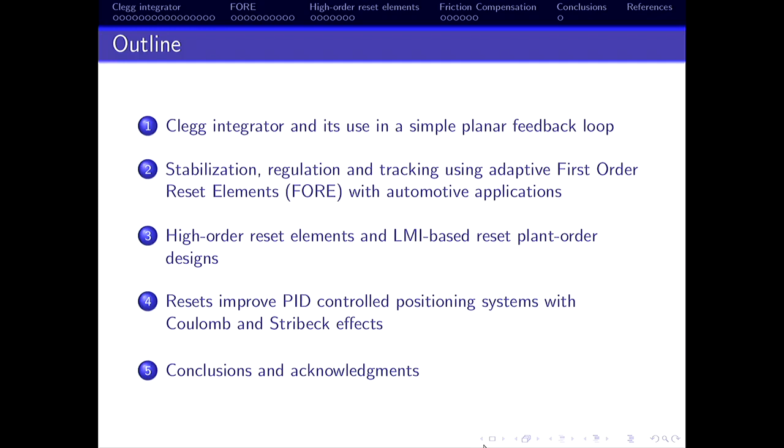Okay, so let's start with Clegg integrators, and in particular, what we're going to look at is very, very simple feedback loops with just a first-order system. So a lot of what we're talking about here is simple. Let's try to make it intuitive. And let's go back to 1958, when analog controllers were around. And so Clegg in 58 said, okay, if we have a PI controller, which involves an integrator, let's try to add a nonlinear nature to it to perhaps improve convergence, performance, phase lag, or something that was measured back then in terms of the linear tools that were available.

In particular, the analog version of an integrator with an op-amp is exactly this. So the differential equation is this one, and if this is minus xc and it's the voltage across the capacitor, that's the integral of the input E. And we're looking at an error feedback interconnection, so to speak. So let's consider the input of this guy being E, as in the tracking error or something. So what Clegg did, he said, let's split this in two parts, an upper and a lower part, and the novelty is these diodes.

So if you look at the upper part, the voltage here, whenever it's higher than the input voltage, will cause conduction in the diodes. So the voltage across this capacitor will discharge. That's a reset to 0. And the same will happen here if this voltage is very low. As a consequence, all and only the positive part of the output is stored up here, and all and only the negative one is stored down here. In particular, it's impossible for this circuit to have opposite signs at the input and the output. So the resets enforce this very peculiar property of ensuring that input and state, or input and output, have exactly the same sign.

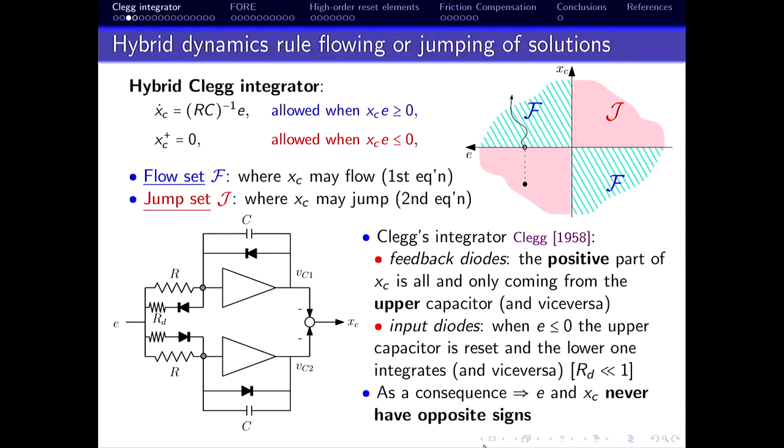Now, this is a hybrid system, and in particular, we call this F the flow set, and the J, where jumps occur, is the jump set. So if you think about evolution of solutions following the great work carried out by Teel and co-authors in the past, say, 15 years, you could put a timer in the solution that is continuous time, which will increase as solutions follow the differential equation, whereas there's a counter counting the jumps that will only increase as solutions follow the difference part. So if we rewrite this in that context, essentially we will look at solutions as having a domain which is a cross product between continuous evolution T and discrete evolution J.

And in particular, the differential equation only relates to T, of course, whereas the difference equation will experience an increase of J, which is, of course, discrete, right? Because that's a discrete time part of the dynamics. Now, if you think about this type of representation, everything becomes pretty much clear about what's going on. The solution either flows and then T grows and J stays constant, or it jumps and then T is frozen and J counts the jump and it grows.

And in particular, if these two sets, F and J, are closed, because of the regularity of this data, if you establish stability of some interconnection of this guy to some, say, linear plant, that stability that you establish is robust, okay? So that's a nice result that all the group has been working on and is well summarized in their 2012 book.

Now, I would like to emphasize what's the advantage of this. And we've been talking about this with Andy Teel and Dragan Nesic during this trip to Australia back in 2004 during the Asian Control Conference, where a lot of these preliminary ideas came up, and much of this talk talks about that stuff.

What is interesting is that back in '58, Clegg was saying in his paper, my circuit resets when E is equal to 0. And this was somehow carried over in later years by Horowitz in the 70s and so on. And people have always been thinking about the resets as being this thin line. Now, the problem with that, especially when you're looking for Lyapunov certificates, is that solutions from here for this model will have to flow. And so if you impose a flow condition on the Lyapunov function, that's overkill, actually. You can see that you will have to impose it everywhere by continuity.

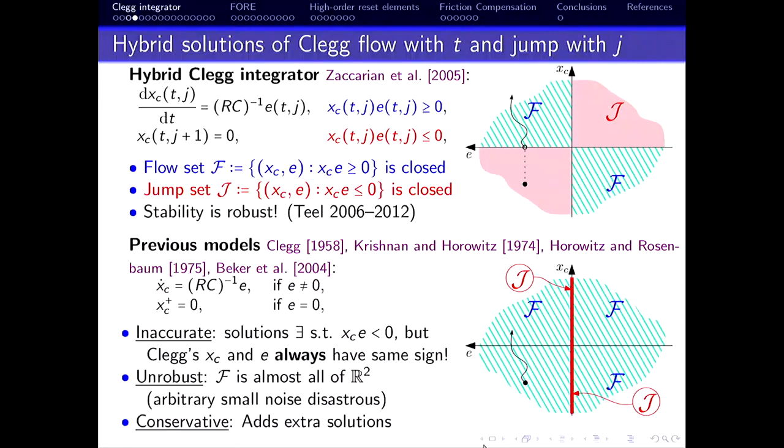Okay, so what can we do with this? We can apply a lot of very useful Lyapunov theory, but perhaps the simplest thing I can tell you is, let's say you have this system, and perhaps there's already an interconnection of the Clegg integrator with a plant. If you want to establish stability of the origin, you could search for, say, a differentiable function V, or a Lipschitz one, which satisfies what we call the sandwich inequality. So you sandwich V within quadratic bounds, so that's positive definiteness and radial unboundedness.

And also, you have a flow condition of the typical continuous time type. So V dot has a negative quadratic upper bound, but you only need to enforce that in F. So that's an important message. F is now half of the state space. And then you also need to enforce a jump condition. That is, when the solutions jump, they should lead to a decrease of V, as in this negative upper bound again, but only in J. Okay? So we call this the flow condition and the jump condition.

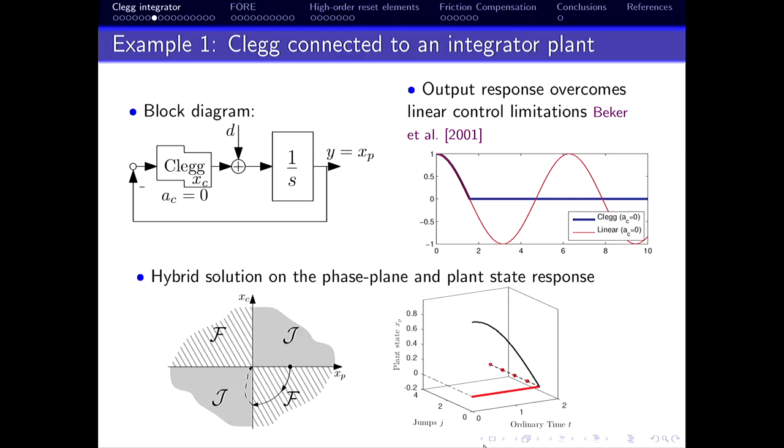It's not really true because there's another bad solution. If we start here, we're at the boundary of J, and there's another solution which can jump, and it jumps forever right here, and it gets stuck exactly at the boundary. So if you're looking for a Lyapunov function certifying stability of the origin for this system, there's no way you can get it, because the origin, at least for the simplified model that we built, is not globally attractive.

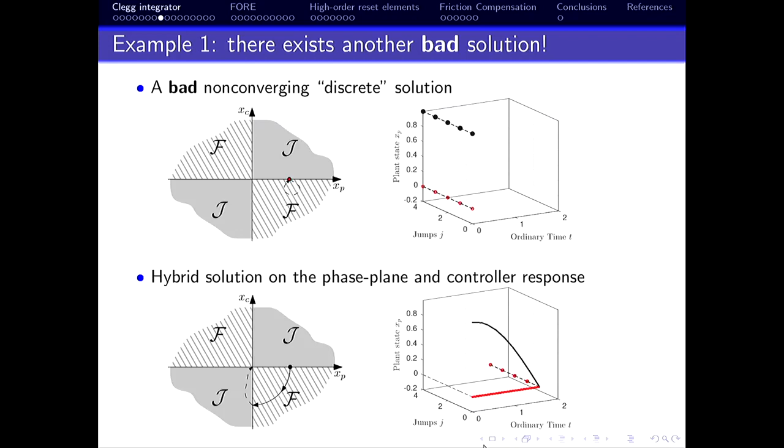So how can we do that? And that's what we've been thinking, like how can we rule out this bad solution? There's two ways, okay? So one is called time regularization. And it essentially comprises starting a timer and inhibiting resets after each reset for some continuous time rho. So you wait rho, and the solution will flow and get away from J so that it can continue as I showed you before. And that works.

The other one is space regularization. That means we can twist the sets in such a way that the jumps will map to the interior of F, so away from J, and a second jump will not be possible. What does that mean from the Lyapunov viewpoint? Well, for time regularization, you have to accept that because of this timer, solutions may flow outside of F. Okay, and we'll get back to that in a sec.

And then in the other case, the problem is more subtle. So you could get space regularization by twisting, you know, the sets in this nice homogeneous way. But the problem is that to make sure that you jump to the interior of F, you really have to be careful about the additional directions. So we're looking at the plane here, but let's already think about what to do with higher order plants, right? So this axis is a lot of directions. And for sure, you will need information about the whole state to comply with this type of requirement, which is kind of an overkill, okay?

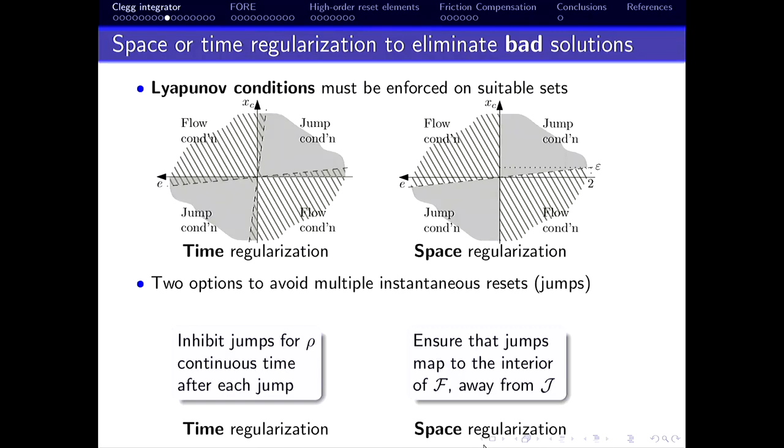Anyway, so most of this talk we will be talking about time regularization, and I would like to introduce a family of systems that is described by this type of logic and that generalizes the Clegg that I showed you so far. So essentially, we're looking at sets F and J, but the sets where the solution is allowed to flow or jump is a bit more sophisticated and depends on the timer. So we introduce the timer tau, which is reset to 0 after each jump, and we are essentially not allowing jumps by definition of D whenever the timer is too small. So the timer has to be larger than or equal to rho.

The nice feature about this is that after each jump, there will be rho flowing time. So we will have what we call persistent flowing, right? The bad side, though, is that because we are, you know, inhibiting jumps, we must allow for flows even though X is not in F, which is what you're seeing here, right? So essentially, we're allowing flow when tau is too small in places that we cannot predict. And that's kind of a problem. So we might have this overflow.

Well, the good news, though, is that at least for these systems, we can prove things that are similar to, you know, linear systems, like equivalence between local asymptotic stability of the origin in the X direction, global exponential stability, LP stability from D, so D is a disturbance, ISS. Okay, so we can use those results. And let's see, if we go back, oh, actually, there's another thing I wanted to tell you.

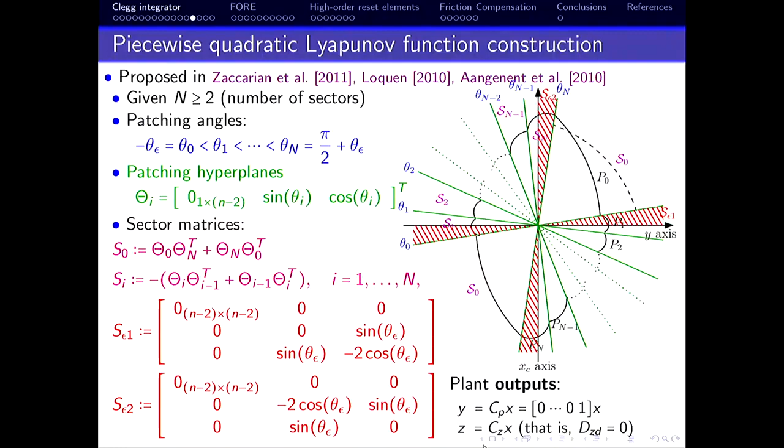And then you have a generalization of the previous theorem. Let's say you have a flow condition, you have a jump condition, and then you have some continuity conditions and some overlap conditions related to the overlapping conditions that I mentioned when I introduced time regularizations. I told you need to ensure that you do well when solutions overflow. So let's go back to the Clegg integrator. We're comfortable with these things. Here are the solutions. They revolve, they reset, they revolve, they reset.

So first of all, there's no quadratic Lyapunov function. You can actually prove that. So you cannot find a quadratic Lyapunov function that certifies global asymptotic stability of the origin, which is exponential because of the other theorem, by the way. Anyway, so we can build a piecewise quadratic. You see how it comes out? This is the level set. It's kind of interesting that there's a lot going on in the flow set, second and fourth quadrant. This is a really simple function on the J.

And again, I'm going to go back to the original thing I told you. Recognizing that the Clegg integrator resets only in half of the state space is fundamental to start talking about Lyapunov functions. And you see that here. So this part is easy. And it's easy because we recognize that the circuit resets over there, okay? And also, you can estimate the L2 gain. And as you increase the number of functions, you get better and better.

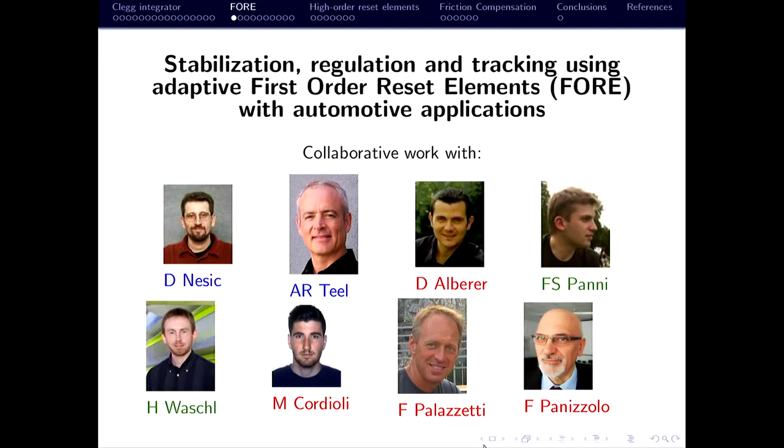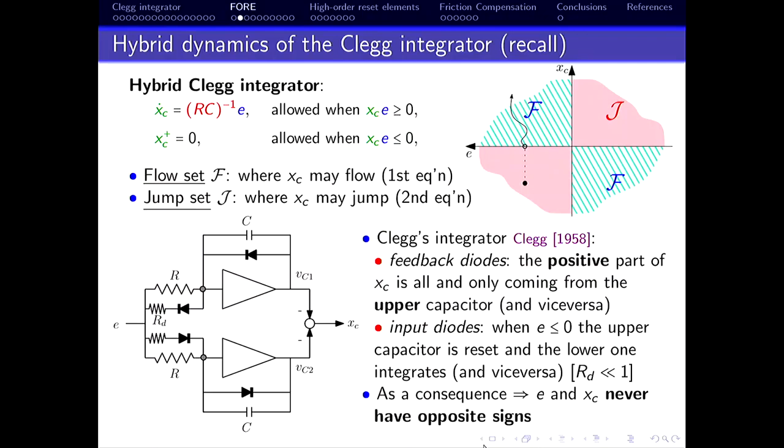Anyway, so let's move on to the second part of the talk. And let's see how we can use now these reset controllers in some more practical things. And in particular, let's extend the ideas of Clegg to something more sophisticated. So I'm back to the previous slide. You've seen this already. And let me think about this as some linear filter with an eigenvalue at 0. So we can add this eigenvalue, and the dynamics will become like this, right? And that's what Horowitz proposed in the 70s.

Except Horowitz insisted on this AC being negative, being not positive. For the Clegg, it's 0. But he insisted on stable first-order reset elements. Now, what we did by looking at these interconnections was to say, oh, no, but let's go beyond that. And indeed, you can prove that if the plant is minimum phase relative degree 1, so let's say a simple plant, but still higher order, then you can crank up the pole. That means making this guy arbitrarily exponentially unstable, and so also the closed loop, or crank up the loop gain, or both of them, and you obtain eventually global exponential stability of the reset feedback.

So let's look at the trajectories. Let's stick an integrator here once again, just for simplicity. And then let's pick the loop gain equal to 1 and increase AC. So for a very negative AC, you don't even reset, okay? Now, for AC equal -1, the linear response would be the black. The blue is the reset. Deadbeat, again, you've seen this on the Clegg integrator. It's the same old story, right?

And in particular, now if we increase this guy, we start seeing exponentially diverging branches which are reset in a deadbeat way. So that's beautiful. That's the main message I want to deliver today. We can introduce exponentially diverging transients on stabilizing controllers. It's really cool. I don't know how useful that is, but maybe it is a bit. So let's look at an application. Oh, no, but first let me actually show you what you get.

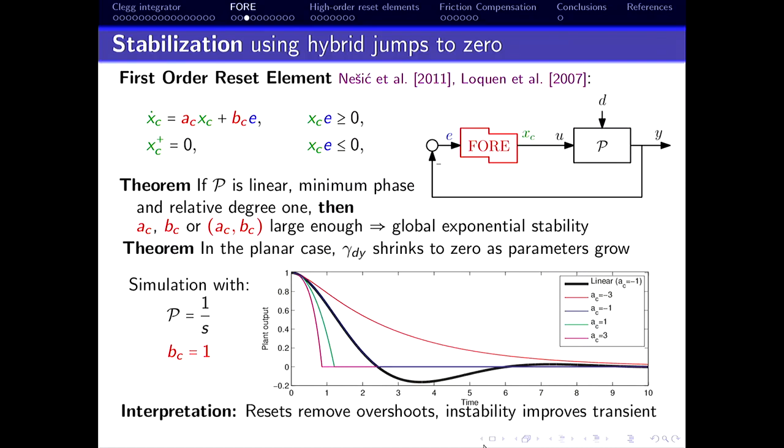So let's apply this thing, and in particular, let's apply again the piecewise quadratic construction to a second-order plant. It comes from the literature of resets, work done by Hollot in the late 90s and early 2000s. So with this one, this is the type of Lyapunov function that you get when you project on the input-output space of the Clegg. Remember here, the state space is three-dimensional. And the gain actually goes to infinity if you only look at the linear without resets, and then goes to 0 asymptotically as AC grows. Of course, we don't have a proof of that, okay? We only proved it for scalar plants.

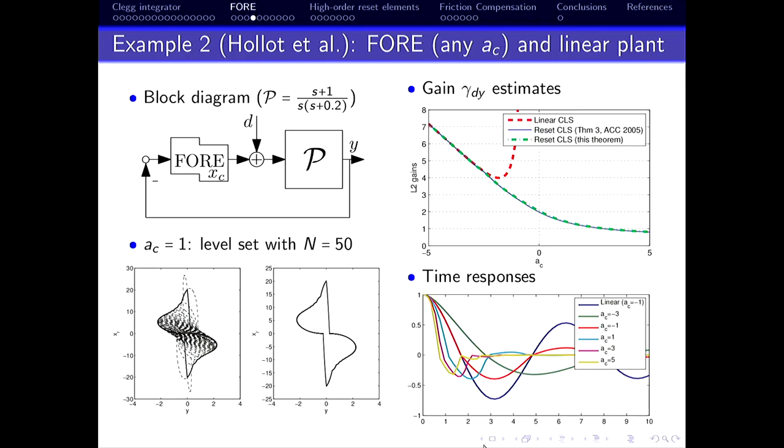But still, looks interesting. Now, if we want to apply this experimentally, the first problem we encounter, and that's another message for today, is that by introducing resets and resetting this guy to 0, the U will go to 0 every time, and that is, in a sense, if we had an integrator, we will lose the internal model properties of the original linear feedback with constant references. And that's actually overkill. So you will start seeing solutions that keep oscillating. So one way to reintroduce the internal model in a clever way would be to introduce an adaptive feed-forward.

Okay, so the feed-forward here is some function that may also include some nonlinearities that we know will happen at the steady state, times some parameters alpha, which are not adapted during flow. They are kept constant during flow, and they are adapted at jumps based on the value of the feedback state. So the feedback state, in a sense, captures the information about the previous errors that we made.

And it turns out with a scalar plant, you can tune the gain lambda of this adaptation following some kind of Ziegler-Nichols type of approach. So you take the system into oscillation for a large enough lambda, and you get something similar to the green curve here, a bit larger. You divide it by 2, and you get some sort of deadbeat convergence of these parameters. Now, if you go too slow with a very small lambda, this convergence will be a lot slower, okay?

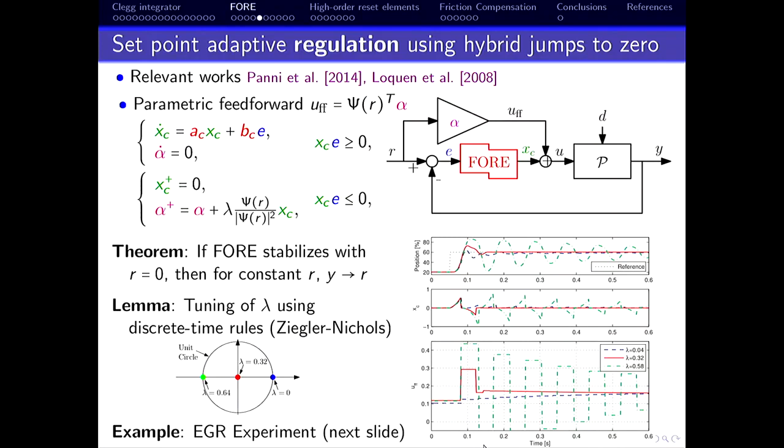And this is an EGR experiment. It's an exhaust gas recirculation valve, and we're doing position control here. That's something I did when I was visiting Linz, next door from here, in 2011. The EGR valve in a diesel engine connects the intake to the exhaust manifold, and it's got a big problem. The exhaust is on this side, so the difference in pressure pushes very strongly the valve to the closing direction. As you're trying to open it, these disturbances are very high because of the high pressure difference, and then the pressure drops. So this is kind of tricky.

As a matter of fact, in my old Punto car, I could hear the EGR valve banging when I was accelerating, because that's Fiat, right? So everybody knows Fiat. I was accelerating, and I could hear from the engine compartment, and this was really the EGR valve banging on its end point.

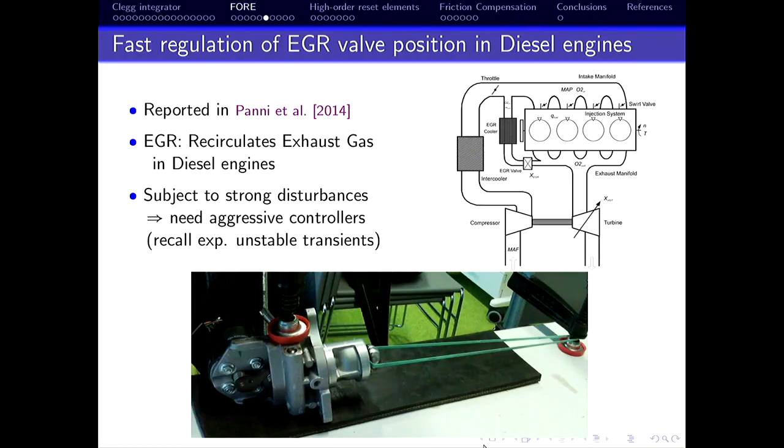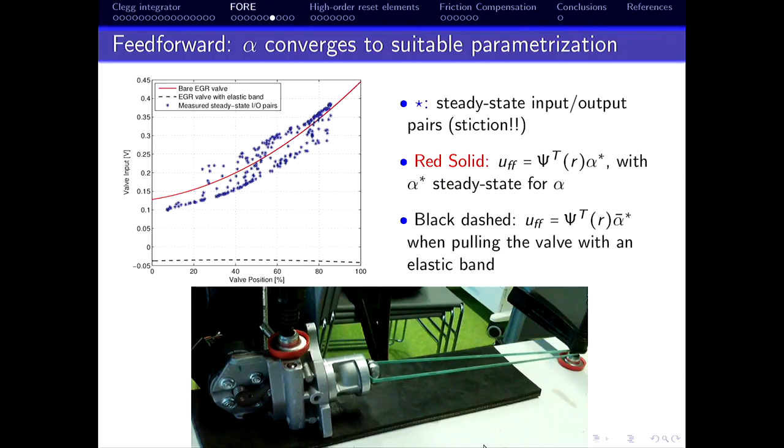Anyway, we don't have much time here, but I want to show you how the feed-forward nicely converges. So this would be the function when alpha converged, and you see all these steady-state input-outputs. There's a lot of stiction on the valve. Still, this does quite well. These are lab experiments, and this tells you what's going on when you train this feed-forward. At the beginning when the alphas are very bad, the output has a lot of oscillations, and of course the input does the same.

I want to show you a step response after the alphas have converged, and I'm very happy about this. The red curve is the reset controller, and you can see how fast it is compared to the best PI we could tune for this step value. If we increase the gains of the PI, we would get steady-state oscillations because of unmodeled dynamics and stuff like that. So this was really the best we could do.

And you see how fast this is, and I really want you to notice the exponentially diverging input. I really like this exponentially diverging input. It's one of the main messages today. So we're doing set point stabilization with this guy. Now, the time optimal that you see here, it took us a day to get an experiment like that. Of course, it's extremely unrobust. We tried to tune the length of the 3 pulses, and eventually got one that gave us the reference, because we could only get it once. Okay, so that's for set point regulation.

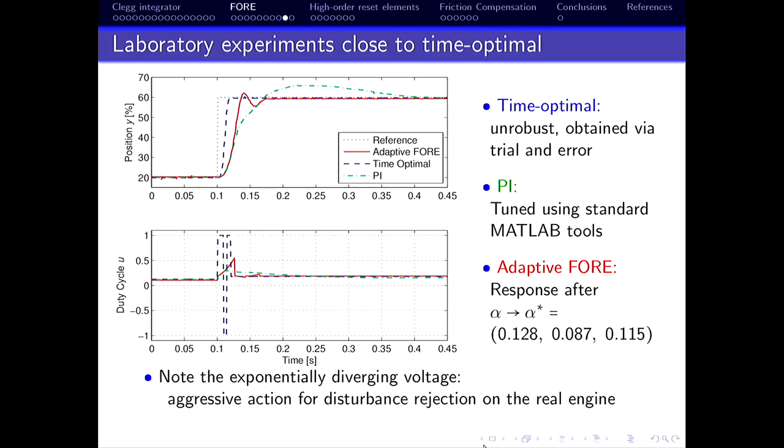There are some generalizations that we're trying to achieve, and I'm going to show you something extremely preliminary. We need to do a lot of work on this, but I still want to tell you one thing. If you're doing reference tracking, one way to obtain that, which is perhaps cheating, is to use the derivative of the reference, at least when the plant is first order. Otherwise, you need adaptive right inverses, and how many derivatives you need will depend on the relative degree. But then it gets a lot trickier.

So far, we tried it with this type of setting, and we applied it with a company close to Trento that works on power split transmission systems of off-highway vehicles, to current tracking in the valve that operates on these transmissions. Actually, this filling problem for clutches is a big problem. I've seen a paper here at NOLCOS on that, so that's interesting.

And one aspect that is important is current regulation: you need to really get the current you want on the valve. And you see what happens here. It's the same as before. The alphas are adapted through an experiment, and the output current, which is the blue, is really bad at the beginning, right? The reference is the gray. But it's very, very good at the end once the alphas have reached their steady state.

And what's happening is that if you look at the input, the feed forward, which is the blue, is very different from the total input. The feedback action is down here. Sorry about the scale. The scale is wrong here. I apologize for that. It should be divided by 10. But anyways, you see these two scales are the same.

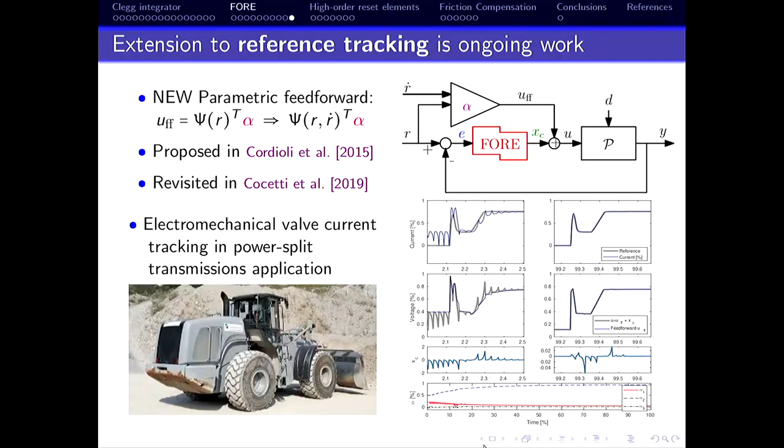Okay, so, I'm done with the main messages. So everything else that is going to come up now is further discussions, maybe trying to go beyond these first order controllers. But it's already good that maybe I fascinated you about these exponentially unstable branches and so on.

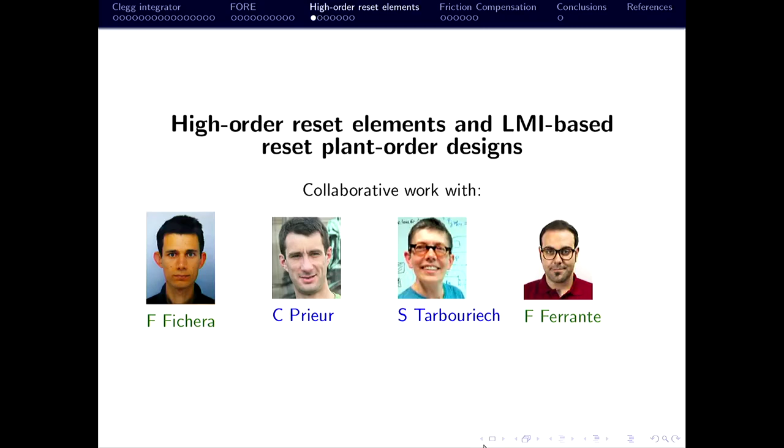Now, there's, however, one intuition I would like to share with you, which is related to looking at this Clegg integrator and saying, look how well it works, right? No overshoot, you reach the set point, it just stays there. What's the catch? What's the core intuition behind the fact that it works so well? And I'm going to try to convey the idea that we had about 10 years ago about generalizations of it. So let's go back to the Clegg integrator, and let's think about a Lyapunov function, which is just circles, okay? So norm squared.

Now, anywhere in the state space, you could wonder, what is the value of xc? Xc is the variable that you can manipulate. And what is the value of xc that actually minimizes your function? Of course, in this case, it will be 0, right? Because you're looking for the place where you're going to be tangent to the levels that are low. If the Lyapunov function was stretched, from here you would want to jump down here, okay? So for this case, the minimizer is actually 0 anywhere in the state space. So that explains why resets are resets to 0, because we reset to the minimum of the Lyapunov function. Okay, so that's my first intuition.

Second intuition, when do we want to reset? So let's look at a function, Vp, which is the original V evaluated along this minimum, okay? So that's going to be the norm of xp squared for this special case, right? And then let's say we are happy whenever this function is decreasing. So in this area, that function, which is the projection of the state on the horizontal axis, will always be decreasing. At this point, it starts increasing. That's when we reset, okay?

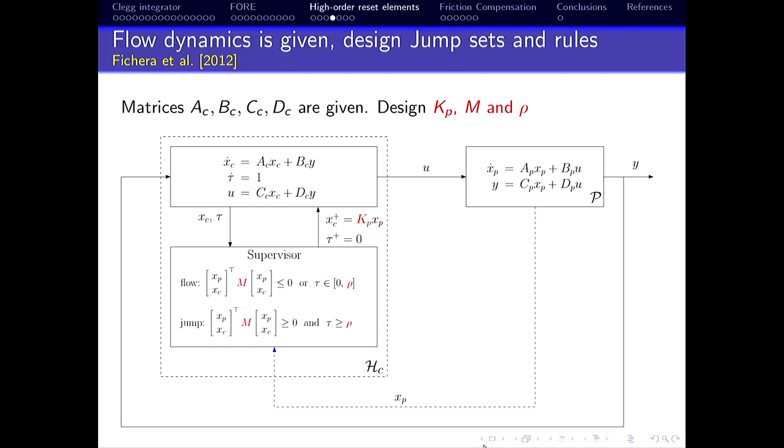Now, you could either design the whole thing or maybe just Kp, M and rho. So if we design Kp, M and rho, I'm just going to show you an example. So we have a DC motor, PI controller, and we do position control. So the linear part that was pre-designed would get us this type of transient. And now let's do this trick.

VP, so let's do the reverse thing. Let's not fix V and then determine VP. You can do the opposite. You can fix VP and then determine the V. Of course, you have some constraints, but it works. So let's fix VP to be the norm of the output squared. Well, that means you're eliminating overshoot.

Well, you can't really fix it to be this guy squared because PP has to be positive. But you can still stretch it a lot, and you still see a little bit of overshoot here, of course. But you get this nice reset.

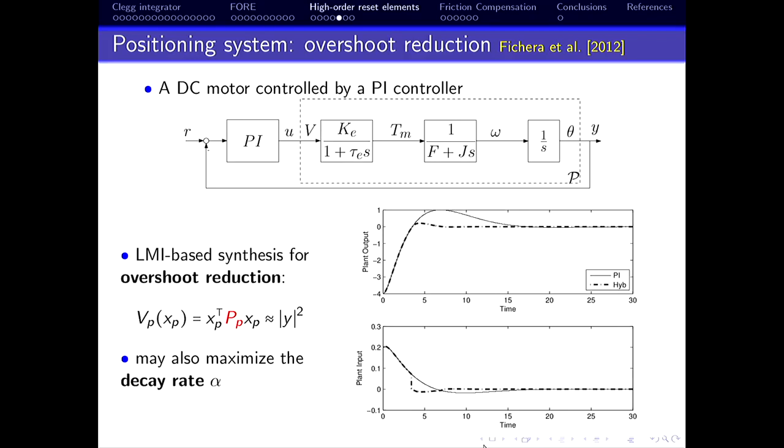You may do other stuff, like you might want to maximize the decay rate alpha by imposing some kind of Lyapunov conditions on the decay rate, the typical A transpose P plus PA less than minus 2 alpha P, right? So the stuff that LMI guys like us like looking into. Anyway, that's one idea.

Now, the other thing that we've been looking at, which gets increasingly tricky, is to say, can we do reset H infinity design? And here, everything falls apart, of course. Things are never easy in life. And so we start cheating. So if we want to design everything, all the blue guys, we can do that, but we need the state. So we don't need the state of the plant for the continuous feedback. But the supervisor, that is deciding when to jump and where to jump, needs the state.

Why is that? Well, it's because of the space regularization that I was mentioning at the beginning. If you want to jump to the interior of F and get these nice properties which are embedded in this intuition, because you jump to the minimum of a Lyapunov function which is positive definite, you need the whole state. So then you could claim that you could add an observer, but it's not going to be used all the time. You only use it when you jump, right? And how do you assess the performance of this? It's kind of a messy thing.

So we can do that, and we can say, if you had the state, the multi-objective goal in the design of these guys in a sort of reset H infinity paradigm is a lot improved, and it is. But in the real system, you have to put the observer in.

Now, the nice thing to tell you is that if you apply the Scherer-like approach, like the factorization of this plant order solution that was presented in the 97 TAC paper by Scherer, Gahinet, and Chilali, you do get nice properties of PP. So that's an interesting observation.

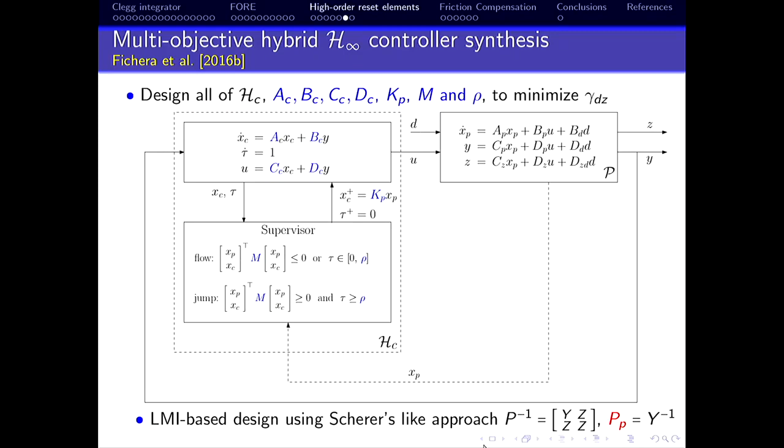Now, let me publicize this talk that will be presented this morning at 11 by Francesco Ferrante, which talks about a new idea. I would like to share with you this new idea. I would actually like to share with you why it is so hard to implement a fully output feedback solution. We succeeded in doing it here, only focusing on exponential convergence. So we're not looking at L2 gains so far.

It's too hard. But what we do is what we could call freeze and play. And the idea is we have to introduce dwell time, right? So because we have to, then we better use it well. And in particular, let's freeze the controller state and the plant input when tau is smaller than rho. How do we do that? Well, xc dot will be 0, v dot will be 0, u will be v.

Everything is frozen, okay? And then let's impose a Lyapunov decrease from the time we reset to the time until tau is equal to rho. We'll take care of the transient in the middle by a suitable overshoot. We don't care. That's a fixed time. And then we can come up with some LMI-based conditions again to design this quite sophisticated control.

You see there's the continuous part here, and there's somehow the discrete part here. So you need to do two Scherer changes of coordinates, the discrete one and the continuous one. And everything works, except for these two little parameters that correspond to line searches. And the Lyapunov function is fairly straightforward, but kind of interesting. It uses the timer a lot, and it is based, once again, on the quadratic stuff, right? But it's a bit beyond just quadratic.

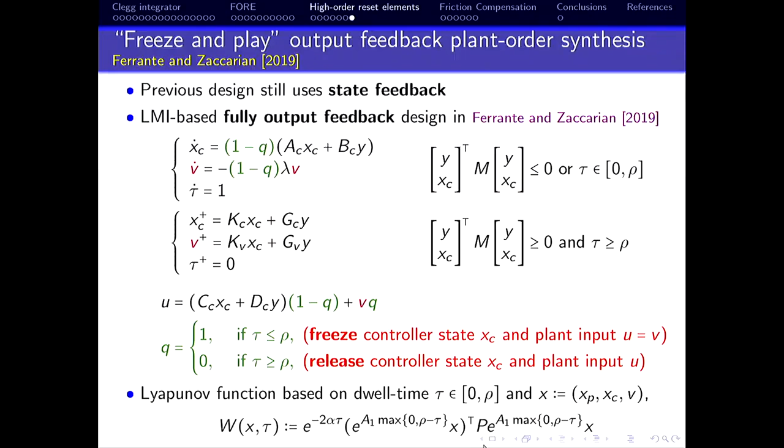Okay, so that's it. I'm done. So I just wanted to finish by giving you another bit of information on something that I've been doing, which is unrelated to the rest of the talk, but it's still reset control. And I would like to tell you the story because I think it's fascinating. It's how we use reset in a motion system with ugly friction effects. In particular, the first thing I would like to tell you is what to do on a positioning system where you have friction that looks like this.

It's Coulomb plus viscous. If you do PID control, it is well known that you have convergence but slow transients, okay? And that's the manipulation stage of an electron microscope in the nanometer precision that is not behaving very well. In particular, what you can do is come up with a discontinuous Lyapunov function. You have to take care of a number of details to deal with the discontinuity of this function. It's especially helpful for proving convergence, and you show that this discontinuous function is well behaved even if you introduce resets of the integral state.

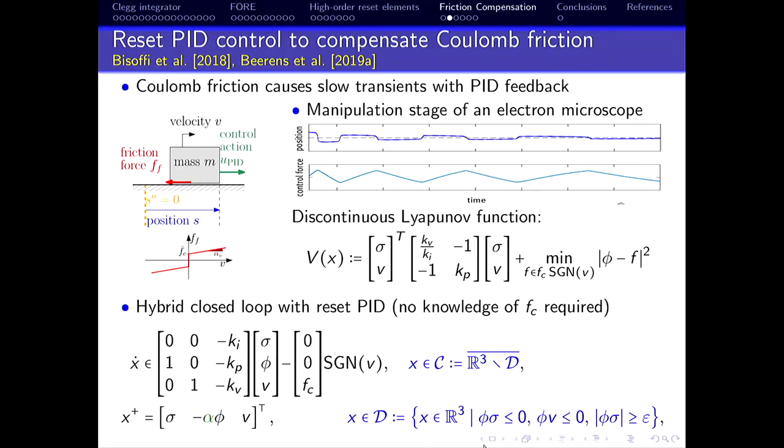As a matter of fact, the dynamics looks like this in transformed variables, where sigma is a position and phi is sort of the integral state, okay? And yeah, it works well. There's an alpha. So notice that what you're doing, you're reversing the integral action, or this is more related to the control input, I would say. And you can then improve performance through this alpha, which is between 0 and 1. So with alpha equal to 0, you get more robustness, but less performance.

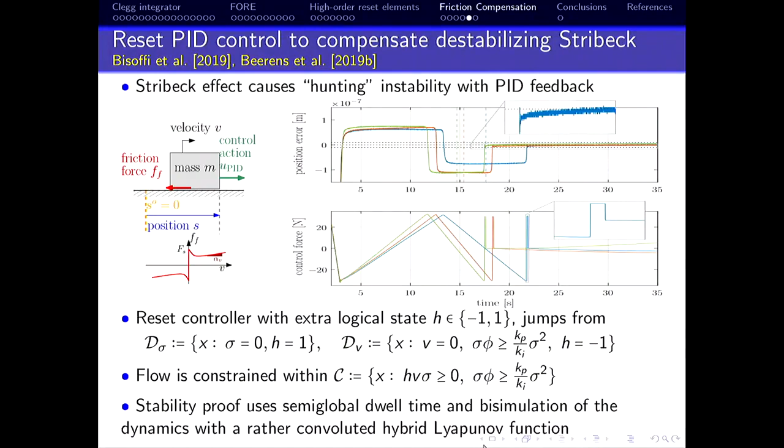Now, we're working on a draft. The proof so far is 12 pages long. It's like a nightmare proof. And I'm trying to see, can we simplify it a bit? Because we have another 6-7 pages showing the theory, the theorem, the experiments. So how can we publish this? I don't know. We'll get better tools as we go along. We need to rely on Andy and all the other great people in theoretical control.

Anyway, I would like to conclude by wrapping up. The only thing I want to mention is that we published a survey paper that covers pretty much everything that I discussed here, except for the last part.